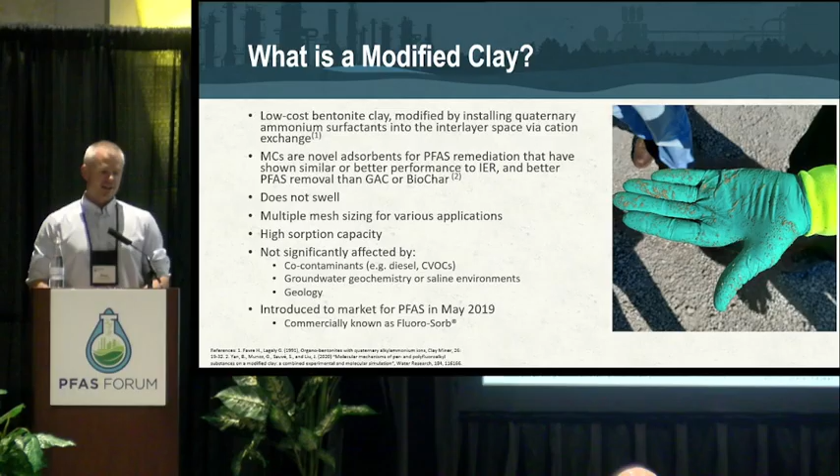And then most significantly, the more that we work with practitioners such as you in the room, we're finding that a lot of these sites are not just PFAS. There's some other type of co-contaminant involved. If you use an activated carbon, it likes to grab onto a lot of different contaminants, so you end up using up that space that's available to you. In the instance of Fluoro-Sorb, we don't have that issue, and we'll talk about why in a few minutes. It's also not affected by various other co-contaminants, geochemistries, saline environments, and it doesn't react with the geology around it, so we don't have that concern.

Some of these I covered on a previous slide, but I'm going to focus on the fact that the number one thing we're comparing this to, because it's what's been used the most in situ in the industry to date, is some sort of activated carbon. I got ahead of myself on the previous slide. But what's important to note is whether you're using a modified clay or an activated carbon, you're talking about something that's a true slurry. So you're talking about different pumps, different designs that you're using to install this in situ.

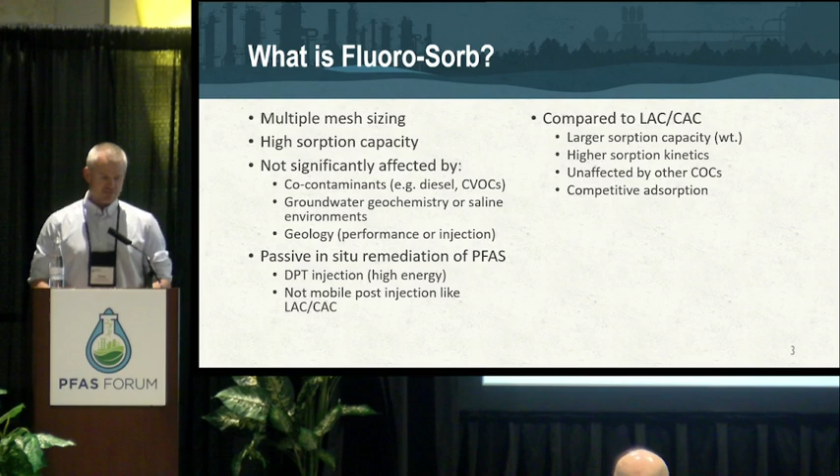So we're talking about very dense, high-capacity slurries for the absorption. And so as we go through this design process, we need to understand a lot about the geology of your site. A lot of things that control a slurry installation in situ revolve around the geology, the starting depth, and then the volume you have to shoot per interval. Those are really the primary constraints on how you come up with a design for your site.

And so I mentioned earlier the absorption mechanism was a little different with the modified clay versus the activated carbons. One of the reasons for that is it can't be overwhelmed like activated carbon can in most settings at a reasonable dosage.

And the reason for that is with the modified clay, as the PFAS absorbs to the plates in the modified clay, it chains onto itself, and you can see from that graph there, it pushes the plates slightly apart, and we're talking on the order of angstroms, so this is not field swelling, but that allows you to increase the uptake of the PFAS between these plates. So there's a very large absorption capacity, especially with the powdered version of this. And also being a powdered version of the modified clay, we can install more of that, so a higher weight percentage in your slurry gallon than you could with even some of the activated carbons that we look at.

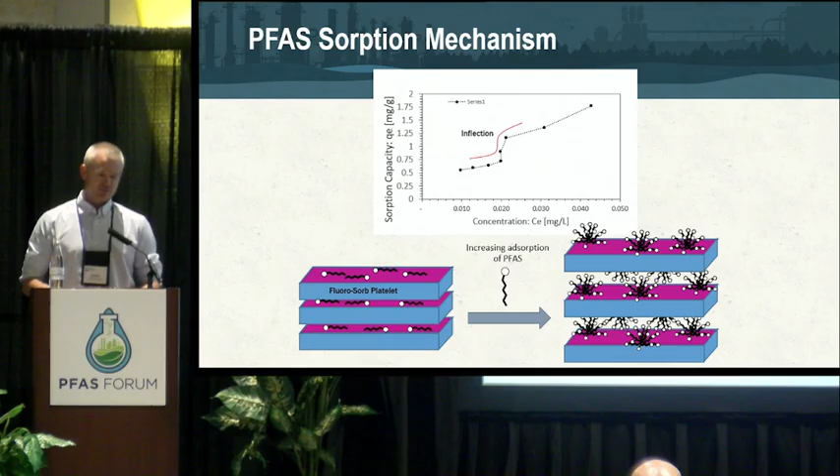Does it work? Well, it's going to be very site specific. So one of the things that we encourage you as practitioners is very early on in the process, not just engaging us, but also engaging the manufacturer of the product or products you're considering. The reason for that is you need to go through an initial evaluation based upon available isotherms, depending on the product you're looking at. You also need to make sure it's deployable, depending on the way you're installing it. And then you probably need to evaluate. A lot of our clients, especially with co-contaminants, are going through a bench scale study to evaluate which product is best. And that's really important.

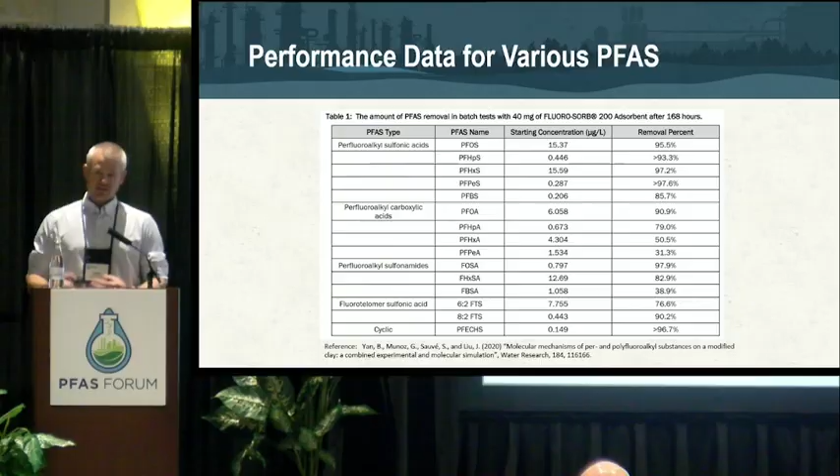An example I'll use later for a site here domestically where we had to use Fluoro-Sorb with calcium polysulfide for hexavalent chromium. In that bench test, we actually found that there was a decrease in both the calcium polysulfide treatment and the activated carbon capacity when they evaluated activated carbon and calcium polysulfide. That interaction did not occur with the modified clay. So again, go to the bench scale study to make sure these things are compatible with each other.

In terms of where does this go, the next few slides focus on a McGill University study. So this is a laboratory bench scale study.

Sorry, for some reason it keeps advancing my slides. I think I got to remove an automatic thing there.

But we're looking at how it compares between different common adsorbents that are used ex situ, even though you may not use all of these in situ, just from an installability standpoint. And specifically, I'm looking at IX resin, something that while there is a powdered version, to date we don't really see that being requested for injection in situ for various reasons. Sometimes revolving around cost, other times revolving around the installability of that product.

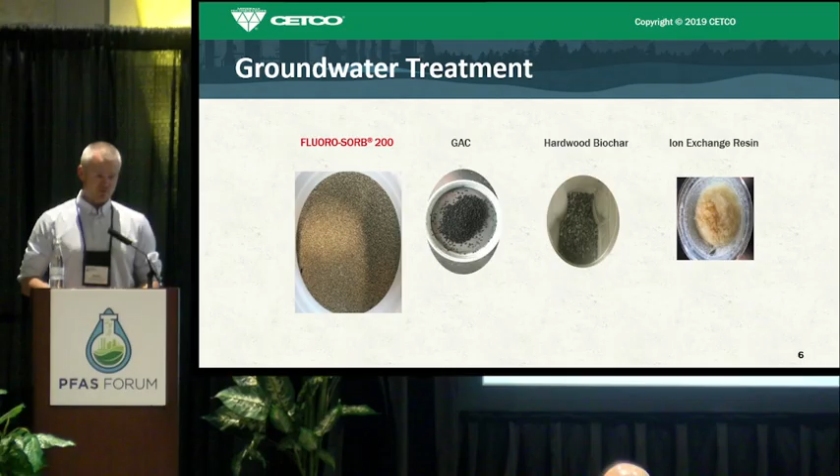And so from a comparative assessment, what can we take away from this university study? Well, we see that the Fluoro-Sorb is very similar or better in some cases than ion exchange for the removal of the total PFAS. In terms of the long chains, they're almost analogous to each other. But we see that both outperform granular activated carbon and biochar.

So we know from an ex situ pump and treat standpoint that these products on the whole have gone through long-term evaluations. We're talking 5, 6, 7, 8 years, depending on the study you're looking at. And so we know that these products are applicable in situ. The question is, is this appropriate for your site, and is it installable in situ?

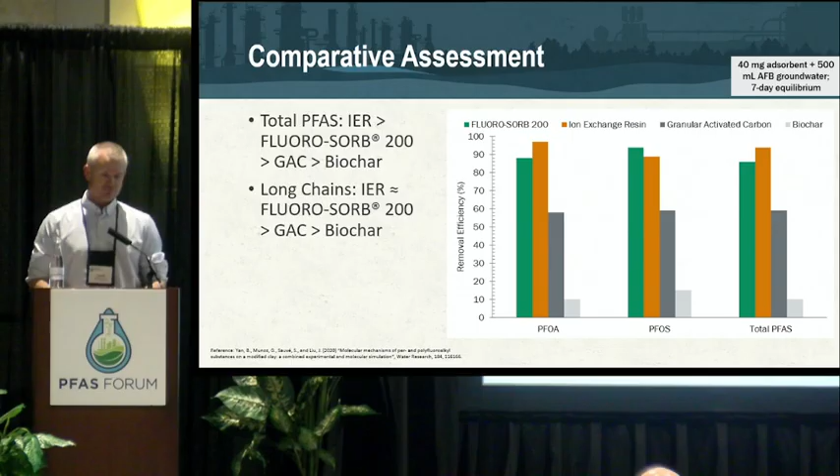Again, I mentioned co-contaminants. In most cases, the modified clay is not affected by co-contamination. And what was interesting in one bench study that involved having a diesel product as a co-contaminant, we found that it actually increased the loading capacity between the plates of the PFAS. And part of that is that levering apart the plates, right, allows us to also absorb additional contaminants there, but we don't have the competition that we do with something like an activated carbon. So everything's going in between the plates.

The site this came from, the client goes, oh, so I can solve this by installing Fluoro-Sorb and putting diesel in the ground. We're like, no, that's a joke. Like, don't run out there and do that.

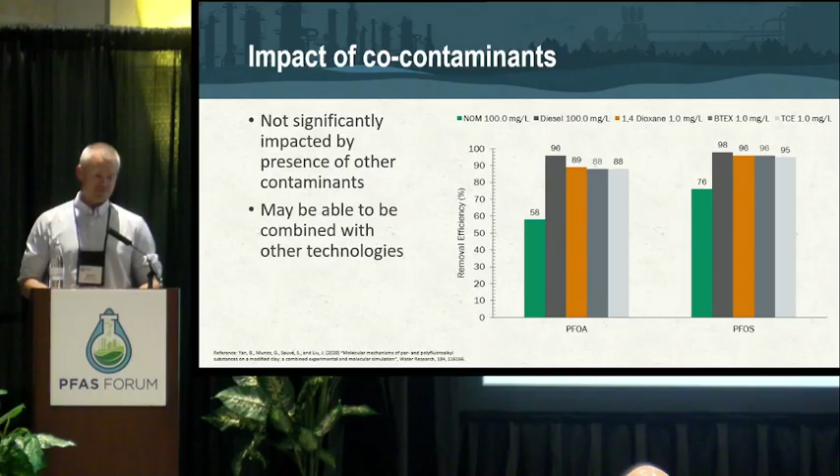But yes, in the presence of other co-contaminants, sometimes the uptake performance does increase. I'd say the number one use of these type of products is right now a PAB, usually cutting off a plume, managing a distal end, something at a property boundary. Maybe depending on the site, if you can't get to the source zone, you might be doing this outside of the source area for management. It could be even in conjunction with a pump and treat.

Most of you as practitioners in this room have probably done permeable reactive barriers, slurry cutoff walls, similar applications. It's the same concept, right, whether you're injecting it or trenching it. I would note that in the injection deployment of a PAB or a PRB, you're typically looking at multiple rows of whatever injectate, not just modified clays in this application, but you need to generate contact. And the example I'll show you here in a few minutes is, when I say generate contact in situ, I know a lot of people call it a contact sport. That's a little bit overplayed in our industry,

but it's really about generating enough residency time with some contaminants as well in the case of PFAS. So it's not just having the product distribute evenly throughout the geology in your site, it's also about having enough flow through time to generate that contact and residency onto the product itself. And so it's extremely hard to do that with one row. 2 rows, better. 3 rows is almost always, on average, the most ideal, especially if you have high concentrations.

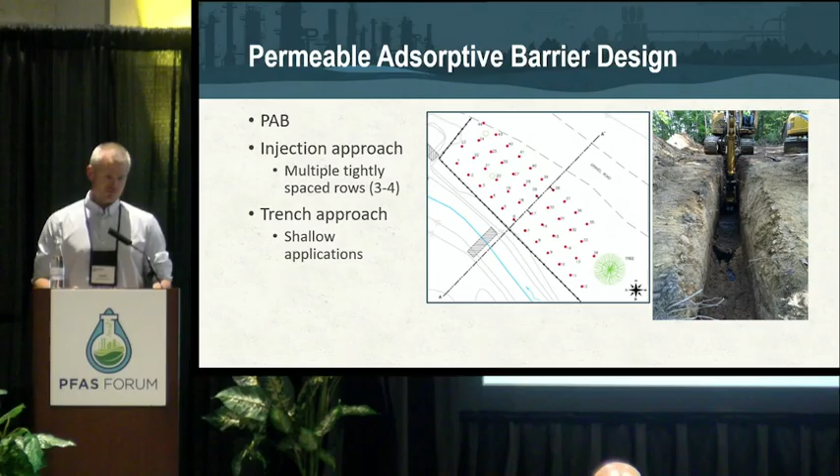So proof of concept, as I mentioned earlier, we have been installing very viscous slurries for over 30 years, and we used a lot of the design and techniques and equipment that we had been using for those other products. We applied them to the modified clay here. And so we did a demonstration project here in Kentucky, and this wasn't quantitative, this was a qualitative evaluation of distribution of the product in situ. So this started with how much can we get in? So we varied the loading rates of the FluoroSorb 100, we varied the loading rates of the FluoroSorb P, and we also evaluated different spacings to see if the spacings based upon depth and geology would be very analogous to either a granular or powdered activated carbon.

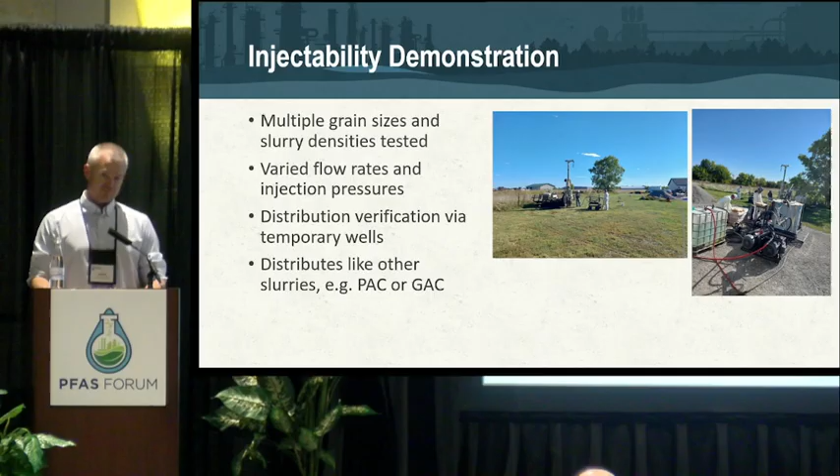So in our demonstration test, you can see on the dip cup here on the right, there's two things that we as installers are looking at when working with any product, and this applies again to modified clay. The first is settling velocity in the tank. What is the energy going to be required to keep that material suspended before we inject it?

Because again, one of the advantages of using systems like these is we're not dependent on using guar or other suspension agents, which you can use for some deployments, and it's applicable for some injection designs for other contaminants, specifically VOCs. But here, what is the most unadulterated way we could put this in situ? And that's what we were looking at.

And so what I'm showing you here, this dip cup here comes out of the batch tank. That's about 2.5, 3 minutes of settling. So you can see in the absence of energy to keep it suspended, it will come out of suspension, as we would expect. What was interesting when we went through this is the cleanup was a lot easier. This washes down well in the tanks.

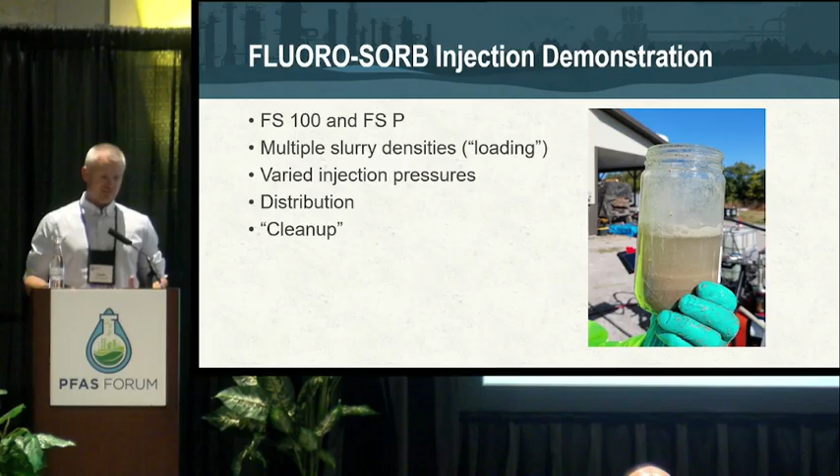Everything was very easy from a housekeeping standpoint, which isn't always the case when we work with something like activated carbon or iron products. This just was fantastic as installers to work with. So that was kind of an unexpected caveat. And again, as we went through this, the distribution was very similar to what we expected from other installations.

So reusing that dip cup that was pulled from the batch tank there, on the right there, that nitrile glove, this is the 100. So this is the 100 dip cup dumped on our hand, and you can see that the product there is like a medium to coarse sand in size. So we are physically installing something with a significant % solids in situ. It is a true slurry.

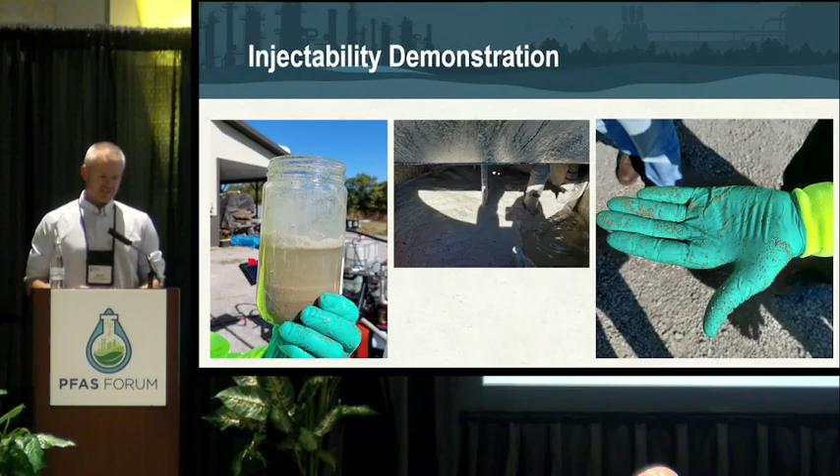All right, so on to the pilot test, the case study here. This is going to focus on a former firefighting training area. They used AFFF containing PFAS. And the plume here intersected a utility corridor with a sewer line in it. That became our preferential pathway. That became the conduit and also the sink for the PFAS transecting the site.

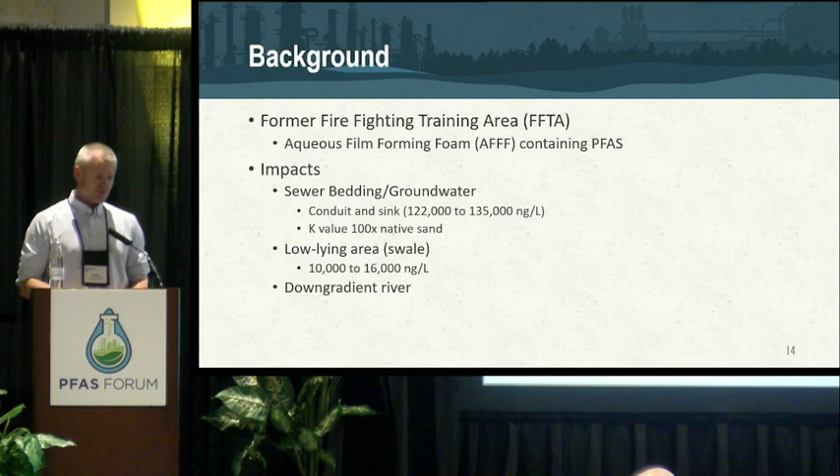As it moved through this preferential pathway, it also impacted a swale area, and then from there it would flow either over or slightly underground towards a down-gradient river where they had variable detectable PFAS over time using the detection limits available to them. So this whole process started as risk management. They want to mitigate, do a pilot test, do an evaluation, and move to a full-scale implementation, which they will.

What we're looking at here is the primary goal was immediate PFAS reduction. So we're not going for a standard. This is how much product can you install because of the concentrations we're dealing with, and what kind of reductions can we see. We're also dealing with a very high flux and variable groundwater rates, and this being located in Canada, we also have snow melt to consider annually.

And they wanted something that was a passive long-term solution, right? Something that's very low maintenance, keep your O&M costs down. So the concept here, as we've outlined in previous slides, is this is going to all be in situ. It's going to be DPT injection. And from a bench scale standpoint, they did evaluate several amendments, and they focused in on the FluoroSorb P for this installation.

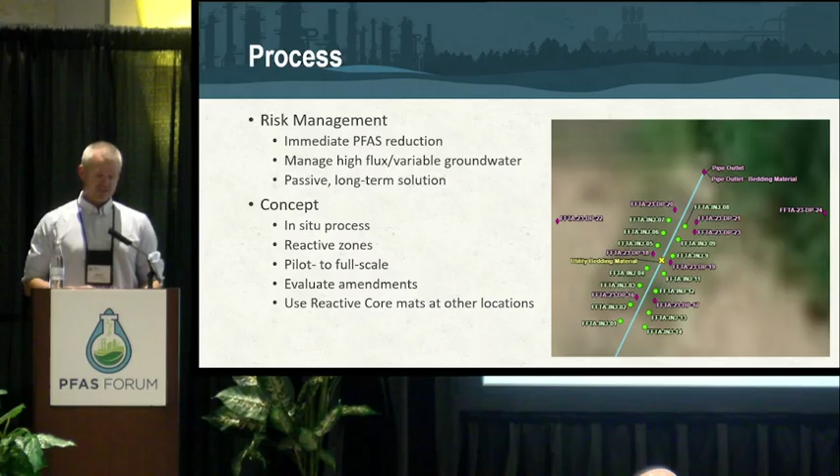Interestingly enough, they are discussing using reactive core mats, which some of you in the room may know are a punched geotextile filled, in this case, with the FluoroSorb. They will use that in some other locations like the swale and up gradient towards the source. So when they approached us, they also asked us to do a bench test study. We actually, in the end, went straight to pilot after the design. They said, we just want to put something in situ and evaluate our site.

So what they did do, though, was they went through both studies we had done and what our partner in Canada, VEI, had done, and they also looked at third-party university studies that had gone through third-party review and evaluation. And what they focused in on was the increase in uptake, or removal in this case, of PFAS versus these GACs versus some of these micronized carbons.

And what we're looking at here on the right is just from one of those column studies that we did in the lab. What we're looking at is the bed volume contact removal here, FluoroSorb versus GAC. This was actually the FluoroSorb 100, I believe. I don't think we had the powdered at that time.

But what we're looking at is, can we overcome the issues we have with activated carbon saturation? Is there breakthrough? Is there competitive adsorption? All of these, which are going to be concerns at any site, were brought up during this process as well. And then the last piece is, can we put in a product that's going to, from a mass standpoint, manage the concentrations we're dealing with, because they were significant at this site.

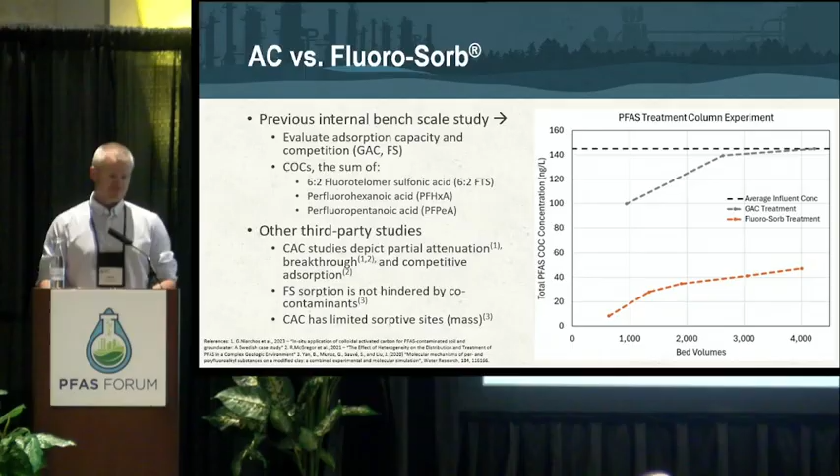So they settled on the FluoroSorb P through this. Again, I mentioned this was DPT injection. We pushed this to a fairly high loading rate based upon the initial assessments we'd done with our pilot test in Kentucky, which ended up being about 3 pounds per gallon, which was effectively a 1.3% weight dosage in situ. We used 5-foot injection centers for this site. Now, again, that's predicated upon the volume of product we have to install per shot.

It's also the geology of the site, which was a fill bedding material. So it's previously disturbed. It does have a lot of porosity. So we know we've got to keep the injectate in the ground. So we focused on getting centers very close to each other. And for this whole installation, we're talking about something that's 5 or 6 feet down to 13 feet below grade.

In terms of performance monitoring for the site, we focused on both hydraulic response using existing monitoring wells. We also installed some piezometers and temporary wells. We also took cores, and we used a proprietary dye tracer here, which we call semi-quantitative. It's colorimetric. What we can do is we can take the soil from the cores, and after we've done a

calibration on it using undisturbed, unloaded soil from the site in that area, we can then calibrate a curve based upon several loadings of, in this case, FluoroSorb P, use that calibration curve when we pull the cores post-injection to come up with how much product was actually distributed at that interval within that core. And it actually worked extremely well in the field. The client was really pleased with that.

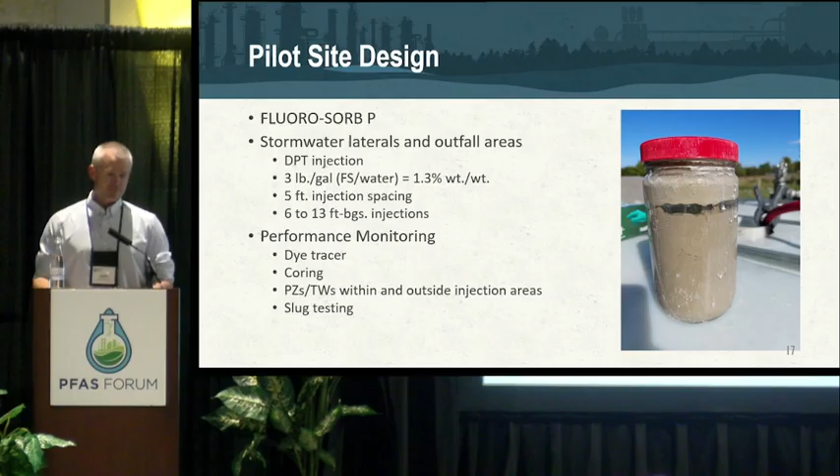And then the last thing we did was slug testing, which will take me to one of my final slides here in a second. So if you're just trying to visualize this from an interlocking standpoint in situ, we're trying to generate what would be a contiguous barrier if you would use yellow iron versus injection. If you haven't done this type of installation before, I can tell you on a performance standpoint for a PRB or a PAB, it works just as well. The performance on these, if you do your design correctly, is going to work just like a trench barrier would.

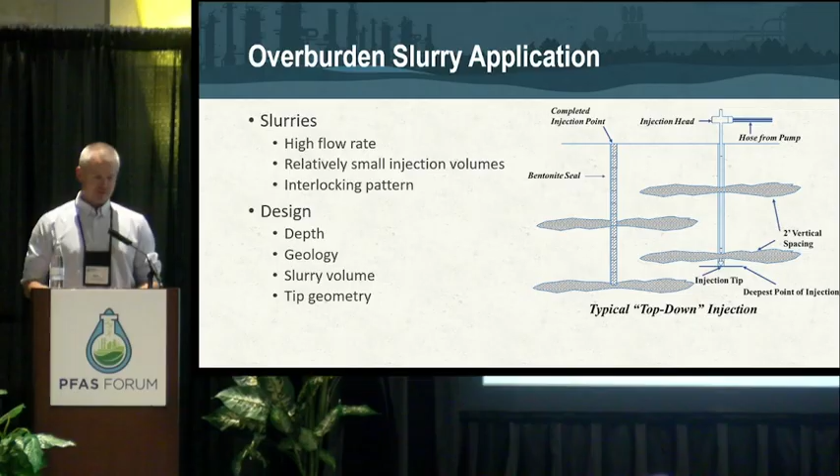What does it look like in situ? Well, here we're dealing with something that's a little bit coarser. So the picture on the right is probably a little more analogous to the FluoroSorb deployment here. That's a medium to coarse sand. On the left, we have a clay. Neither of these cores are actually FluoroSorb product. We're using a powdered activated carbon in both of these. The reason I chose that is because you can see the distribution, which again is analogous to the FluoroSorb,

the modified clay product. And what we're looking at here is on the left, a true fracturing, but also because of the pressures we use, we do get interstitial dispersement of that vertically as well within the spaces of the clay or the fine silt. And then on the right, we are looking at what we call radial co-mixing, which is a physical tumbling of the formation with the product. So you get a much more even distribution there. It actually requires higher pressures. And again, none of this can be done low flow, low pressure. This has to be done with high energy.

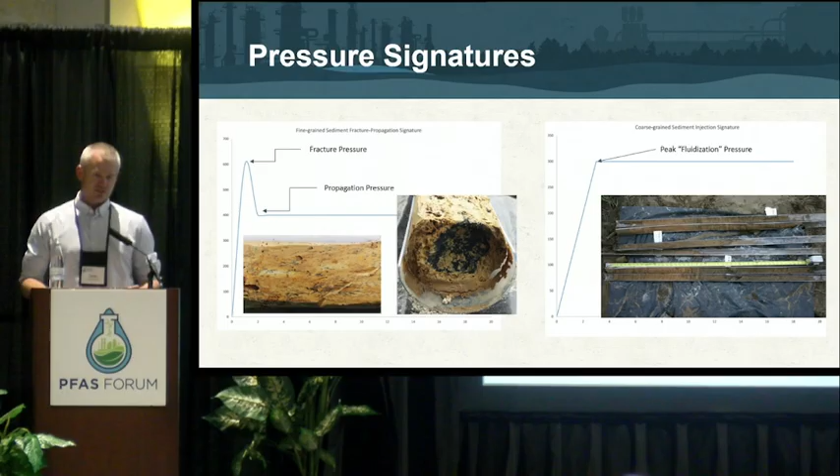And so here's what that installation looked like from a schematic standpoint. The bedding in the area we ran the pilot was on average about 135,000 nanograms per liter. And we installed, in most cases, at least 3 shots per DPT point, as you can see on the right, and we traced it down the sewer line.

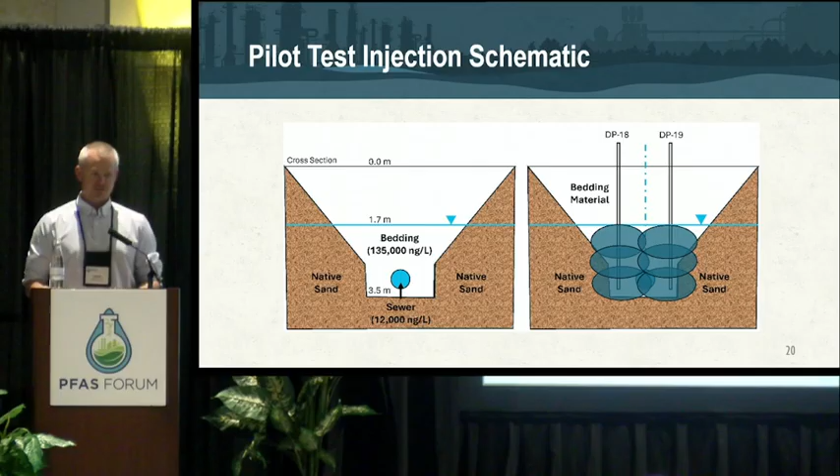And so here's what I was talking about, the slug testing. I'll wrap with this. We get asked a lot when we install, especially very, very viscous, dense slurries, is there going to be a change in hydraulic conductivity at my site? And with this product and others, we can demonstrate using slug tests before and after injection that there is a very small reduction in hydraulic conductivity, typically within the margin of error for the testing you're doing.

So can we say that we have not changed at all? We can't say that, but we can say that it's so minuscule that it does not hinder the overall flow at the site.

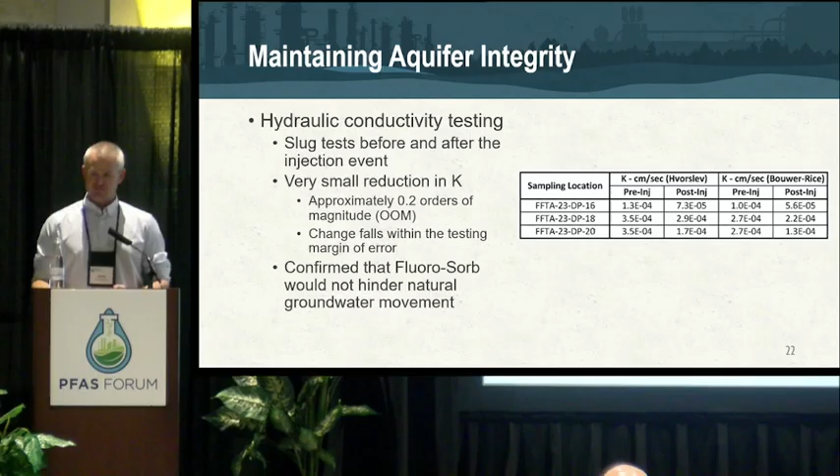And so here's the performance from the site. The initial reductions 4 months into this within the source area of the bedding of the utility corridor: we saw total PFAS reductions of 89% on average. Within 9 months, those had climbed to 93, and we're approaching 95, 96 at this point for total.

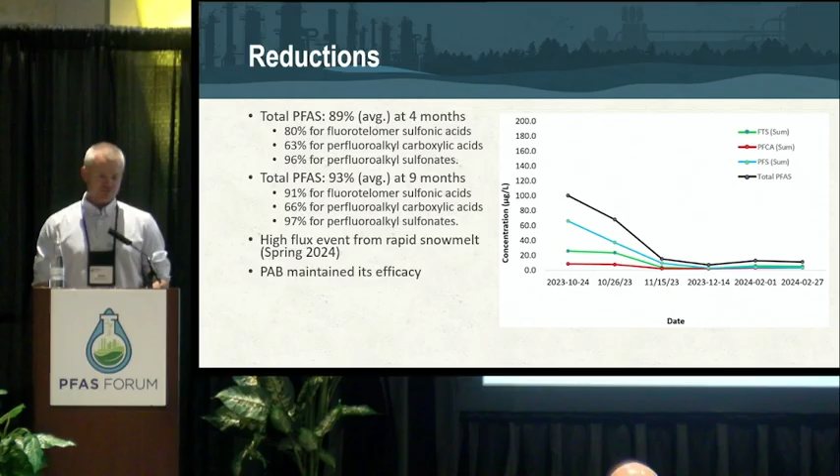We also weathered a high flux rapid snowmelt event. That was something else we had to account for. You can kind of see that there in the February 2024 data. There's a very slight uptick in total PFAS, but again, considering the concentrations we started with, these have come down significantly.

And I'll just mention, we've got some other work going on here. I didn't have these available in time for this presentation, but we are doing PFAS and hexavalent chrome. Again, the products are compatible with each other. And then we've also done some funnel and gate evaluations at sites in North America. The one I've got here on this slide, that's a funnel and gate with a cartridge.

So they evaluated different loadings within the cartridge, and they'll pick one, and then they'll cycle that cartridge out just like you would an ex situ system, except this is going to be an in situ cartridge for that treatment. But again, you can see the removal from the lead and the trailing cell in that cartridge. Again, the modified clay was highly effective in removing the influent PFAS.

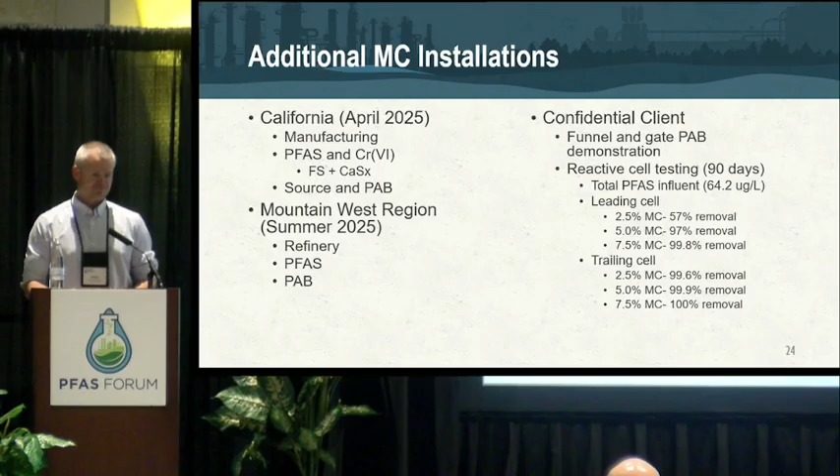So in summary, we demonstrated that modified clay is not just laboratory suitable for the sequestration of PFAS. It can be injected in situ for the sequestration. Co-contamination, which we deal with on a regular basis at a lot of sites, does not affect the performance of the modified clay in situ. The modified clay is injectable using conventional high-energy injection systems, which are available, and it can be co-injected with other reactants and products, as you saw from the comments on the previous slide.

And we are evaluating more than just calcium polysulfide and other iron products out there that can go with it. So that's ongoing both in our labs, CETCO, and our clients as well.

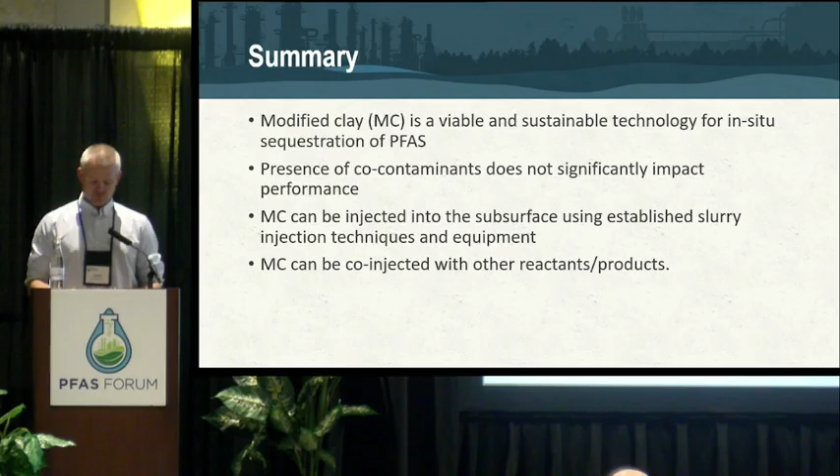We have time for a couple of questions. I have one or two. How's the particle size of the modified clay compared to colloidal carbon, as well as the cost per unit price?

I knew someone was going to ask the cost question. And what do we all say on the panel? We always say, I was joking about this with Cameron, we always say it depends.

I mean, on a pound per pound basis, the modified clay is generally less expensive than a micronized, a powdered, or a granular activated carbon. In terms of sizing, the 100 again is comparable to a granular activated carbon. It's probably highly comparable to, say, Calgon's F400.

In terms of the powdered, I'd say you're probably looking at a very fine powdered activated carbon in terms of mesh sizing. CETCO may have some more details on that, but I think we're talking about something in the order of maybe 20 microns, somewhere in that range. I see Rebecca nodding her head, so at least I'm in the right ballpark. Any other questions?